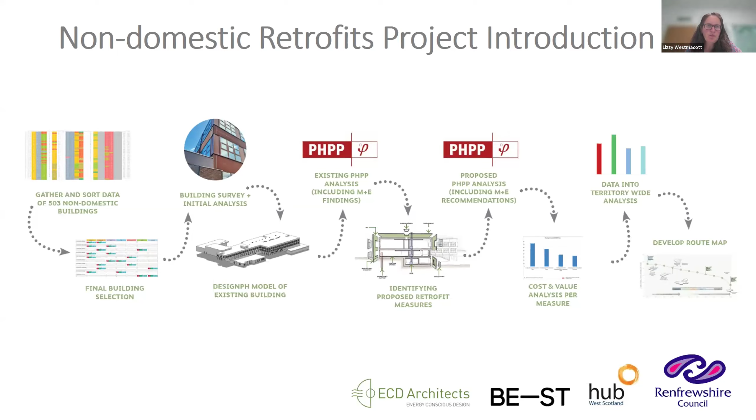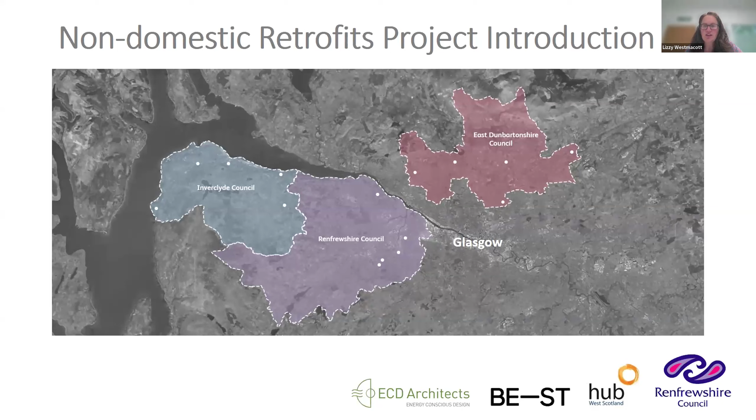I'm going to hand over to Neil now to talk a bit about why this is important to the councils.

Okay, thanks, Lizzy. So the Renfrewshire Council has 238 non-domestic buildings, but buildings isn't really our business. We provide key services to our communities. There's a local authority on the left there - that's what you'll find on page 1 of our website, and our buildings support that delivery of services. Obviously, we have operational and management responsibilities over them, but really, the vital thing for us, top priority, is continuously delivering those services. And any changes to that or disruption to it needs to be very carefully managed.

We do look to continuously improve what we can offer and remain adaptable to changes that come along, and that is a target that we are always working to. But this net zero challenge really is a step change that has been asked of our building stock. It's really unprecedented. I think we all are aware and signed up to and in full agreement with the political intent, the emergency in the climate. However, reality does bite when we go and look across our estate and see exactly how big the challenge is to upgrade or improve some of the buildings that we have.

And we really need to pivot, as the word I've used, to change our view of investment return, that the benefits we achieve aren't simply a financial return on investment. We have carbon as a currency now, and reducing our emissions and reducing the consumption of carbon is my top priority beneath delivery of services. And really changing our view of that and changing our view of how we make those investment decisions is going to be really important. Maintaining momentum is quite difficult because it's such a huge issue, a huge matter for us to deal with.

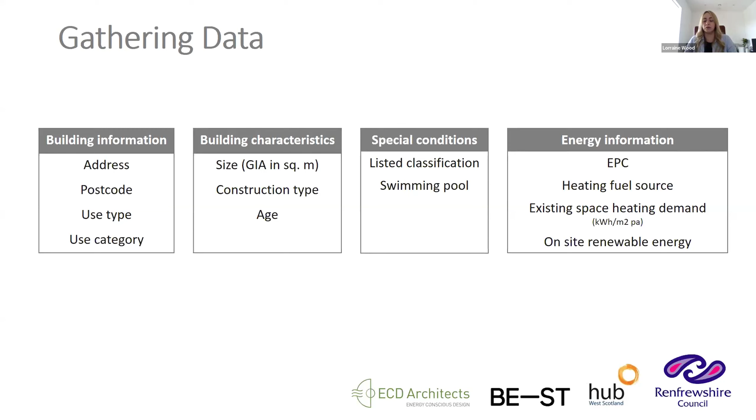We wanted to pull out any special conditions that would significantly impact a retrofit strategy, so things like if the building was listed or had a swimming pool, and then any general energy information such as the EPC rating, fuel type, space heating demand, and also whether or not there were any on-site renewables already.

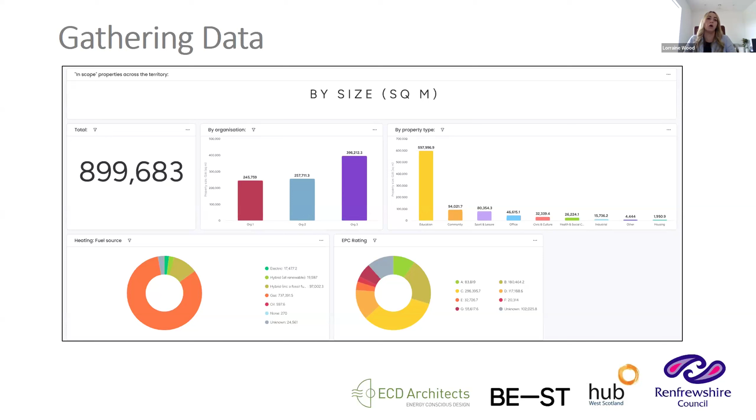Below this, the bottom left chart shows that the vast majority of the estate is fueled by gas for heating, and on the bottom right we have the breakdown of EPCs. That's just a quick snapshot of the type of data we could look at - we looked at it by size, by number of buildings, and all sorts of other things in between.

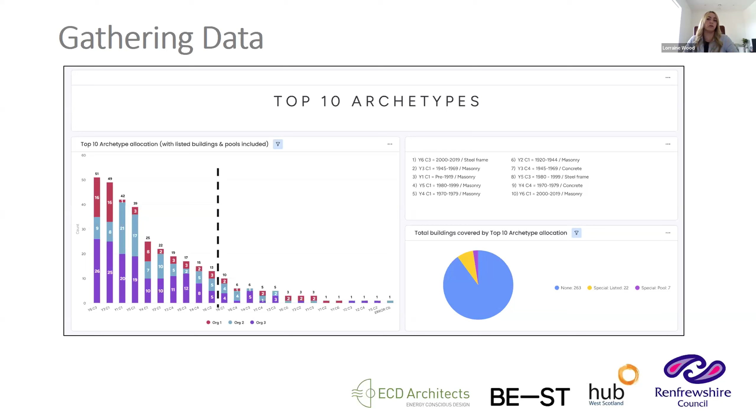The reason we wanted to assign archetypes was so we could understand what a general retrofit approach would look like when applied to groups of similar buildings. The idea was to complete detailed studies on 1 or 2 buildings from each of the 10 archetypes, pull out key data points like estimated retrofit cost or carbon reduction, and apply those baseline figures back into the database to understand the implications for the entire estate.

So that's kind of all from me at the moment. I've tried to summarise what was a fairly complicated process in a very short amount of time, but hopefully that gives you a flavour of the steps taken in relation to data and assigning archetypes. I'll now hand back to Lizzy, who will tell you more about the building studies.

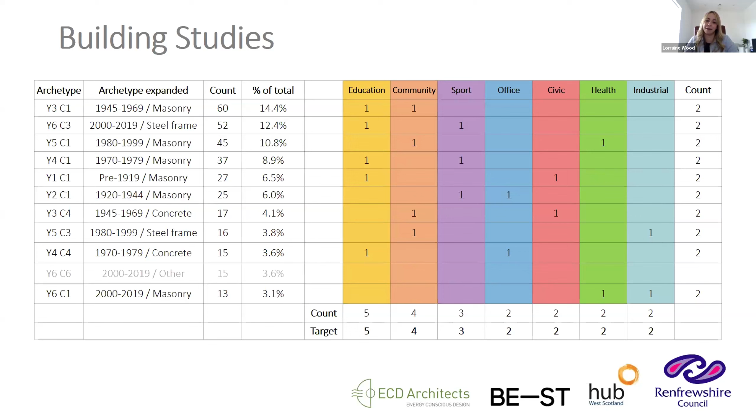So alongside that data gathering and sorting process, we were also working out with the councils how we were actually going to do these studies and what information we would be able to work out for each of the buildings we studied, so that we could extrapolate it across their wider estate.

That was really important - setting a target of how far we're going to go with these retrofits we're proposing. The councils each have set their own targets for when their whole building estate and all that they do will be net zero, and therefore when they'll need to decarbonise their buildings.

And that decarbonising means stopping burning gas, so getting rid of gas boilers. As Lorraine showed, the vast majority of these buildings are currently heated via gas boilers. But if we just take out the boilers and run the buildings on electricity, even using that electricity to power a heat pump, that will typically still put the energy bills up because electricity is that much more expensive than gas.

So for each building, there wasn't a specific target in terms of kilowatt hours or carbon. The target was finding a sweet spot where we do enough fabric retrofit to reduce the total energy use so that when we swap the boiler out for a heat pump, the energy bills won't go up.

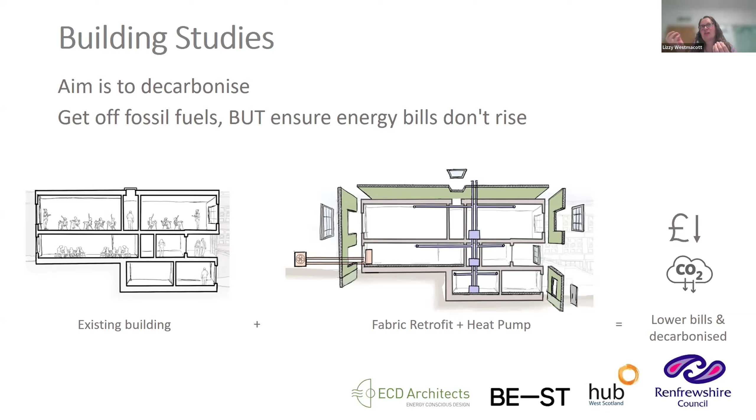So you start with your existing building on the left, you add on this fabric retrofit, you add on the heat pump, and consequently, your bills go down at least slightly, but crucially, the carbon emissions go down.

So back to the buildings that we chose, and we picked these buildings, and then we spent a lovely few weeks, or a few days of a few weeks, visiting these various buildings. So we've got a town hall in Milngavie, we've got various schools around the place. We've got a community centre right on the coast at Wemyss Bay.

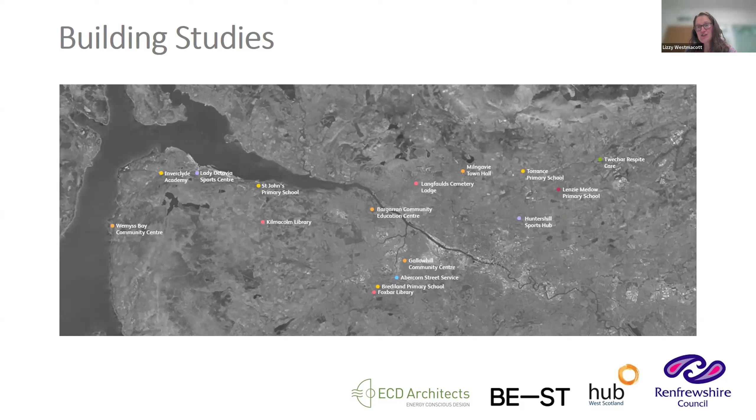We also hung around buildings with clipboards and measured things, tried to find out what was behind the render. Sometimes the buildings made that very easy because the render had all fallen off. Other times it was a bit more guesstimation going on and trying to find bits of the buildings where we could work out what the construction was.

And while we were in each building, we also made sure that we spoke to some of the building users and those who ran the buildings day to day. So that was both to find out about the issues that they already have. Is it drafty? Is there a leak somewhere? Have you got a mold issue? Does the boiler break down all the time? Some of those things the councils already knew, but sometimes, speaking to people on the ground can highlight certain things. But we also needed to understand how often the various areas of the buildings are used.

So here we've got a plan of a library and community centre, and the different areas are marked up in different colours. And then we've got a schedule that went along with that, showing how much of the time each of those areas is actually in use. Some of the buildings we use really consistently. So schools generally at the kind of full capacity during the school time, but obviously in the summer, they're not much used. Some of the buildings are used far less frequently.

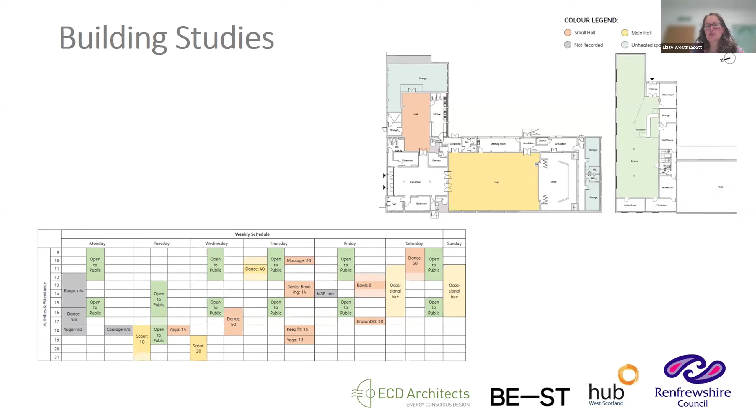So this affects not just how much energy the buildings are going to use in their existing condition, because they might not be heated all the time, for example, but also how we might go about retrofitting them, because disruption is going to matter a lot more to some building uses than others.

And for each building that we went to, as I say, we tried to understand how the building was put together, and we produced a sort of sketch section to at least part of the building, demonstrating our understanding of the current building construction. And then once we proposed our retrofit measures, we applied those onto our sketch section to give each council an idea for each of their archetypes, the sorts of measures that we would be proposing.

And we also went through and kind of highlighted where the risk areas might be in terms of retrofit. So where we need to be sure that we were really understanding any thermal bridge risk or any water ingress risk or whatever. So that gave them a bit more than just the data. They also had something that informed the specification that we were giving for each archetype.

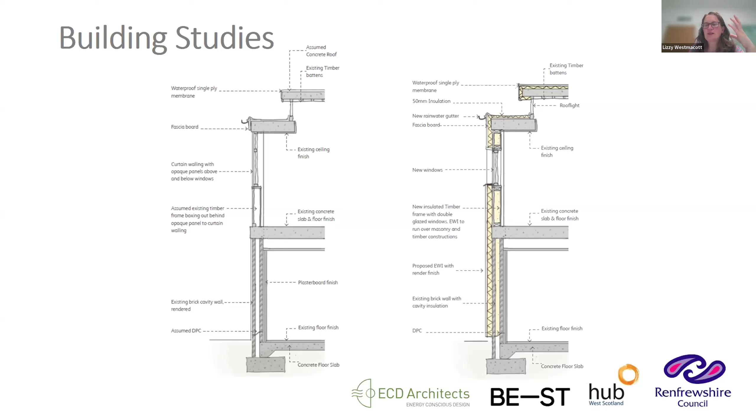Using our passive house planning package model, this is an example of the output we got for the heat demand of each building.

On the left here we've got the heat demand of an existing building, and on the left-hand graph we've got all the heat losses from that building. We're losing a lot of heat through the roof, quite a lot through the walls, and so on.

Then here we've got the heat gains in that building. We've got some solar gain, so sun comes in through the windows and heats the building up a bit, and a little bit of internal heat gain because people are doing stuff in the building. All the rest of the losses need to be made up for by actually putting heat into the building, using the boiler.

After the retrofit, we've reduced our heat losses quite a lot. We've insulated the roof, so we've reduced the heat losses through the roof, and we've insulated the walls, so we've reduced the heat losses there. We've still got some solar gains and internal heat gains, but because our losses are so much lower, we need far less heat to keep the building at a consistent temperature. We've managed to reduce that heat demand by 156 kilowatt hours per metre squared per year.

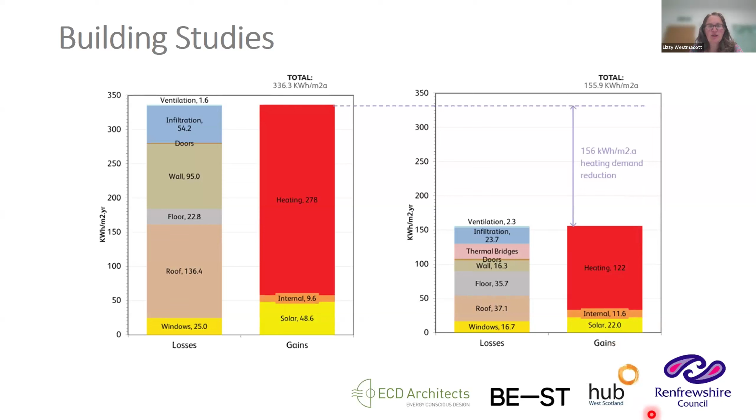That reduction in heat demand itself lowers carbon emissions, but it also means that when we put the heat pump into the building rather than the boiler, the heat demand will be low enough that the heat pump can work efficiently, and it will also cost less to run than it's costing to run the boiler at the moment. As I said earlier, that target's really critical for the councils.

Another graph, I'm afraid. On the left here we've got the energy bills of one of the buildings at each proposed retrofit step, and on the right we've got the carbon emissions for the same steps.

This is our current energy bill, around £36,000. If we just insulated the roof, those bills would drop to around £27,000. If instead we just insulated the walls, so external wall insulation and cavity wall insulation, our bills would drop a bit, but not by quite as much, down to £31,000. And so on and so forth.

If we put in just a heat pump and took out the gas boiler, our bills would shoot up to £52,000. So it was really important we didn't do this - this is why we're doing all of these fabric retrofit steps as well. They'll make the buildings more comfortable and probably more durable, but also we need the bills not to go up when we put the heat pump in, because that's not affordable for the councils.

Adding PVs also reduces the bills. If we put all these measures together - fabric retrofit, heat pump, and photovoltaic panels - we can see that we're actually managing to bring the energy bills down.

If we look at the same thing but in terms of carbon, we've got our existing carbon emissions, 63,000 kilograms of carbon emitted a year by this building. Trying out each different step of the retrofit, you can see the impact on carbon emissions.

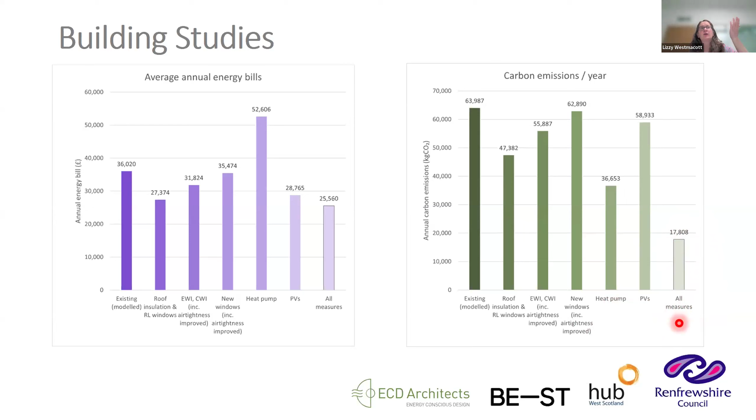So then for each building, we got useful things like the cost of doing these retrofit works and the total carbon savings of these retrofit works. But we also calculated what those were on a per metre squared basis.

Because it's all very interesting knowing how much it'll cost to retrofit this particular building, but what we were really interested in for the big picture, for this big data picture extrapolation across the estate, was those per metre squared figures, because that's the information we want to apply to other instances of similar buildings of the same archetype.

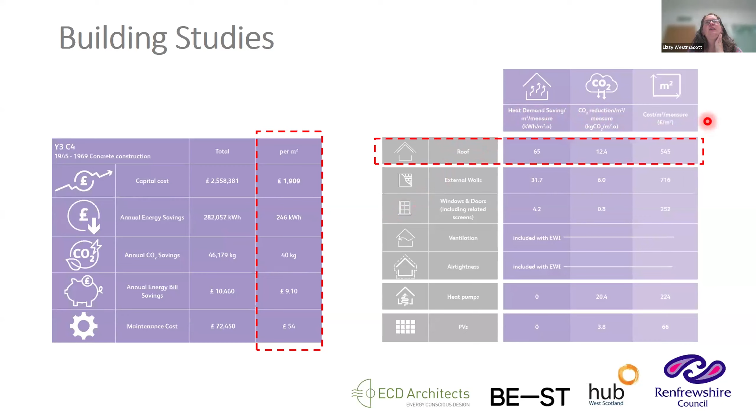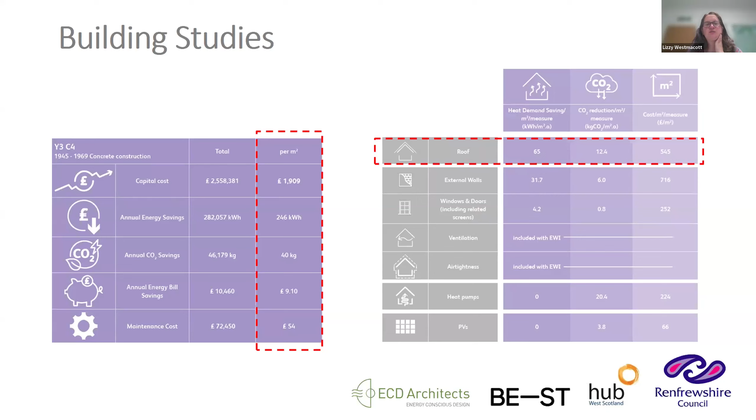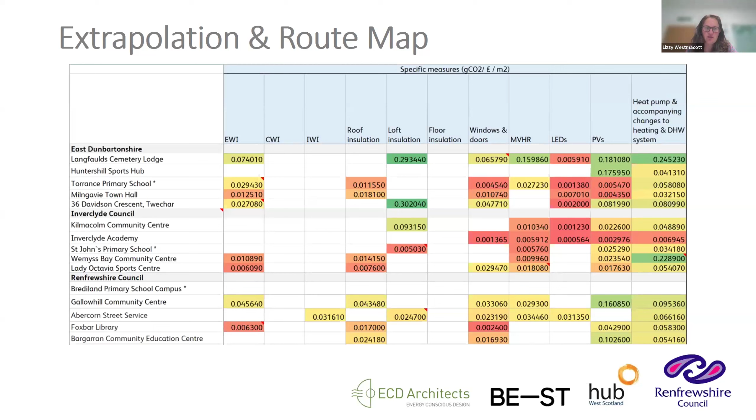That's a very specific breakdown, but it's the kind of data we were able to apply to all the other buildings. That meant that for every building across the council's estate, we had an approximate cost of doing retrofit work, amount of carbon saved, and so on, so each council could see how much carbon they could save, how much it might cost, and think about the impact of individual measures within the bigger picture. This is still a work in progress, but we've had detailed discussions with one council to create their own specific roadmap.

In their case, they started off with 93 buildings, and they're already planning to dispose of some of those for various reasons, some of which they'll actually be rebuilding. It made clear to everyone how imperative it is that any new buildings be net zero, because we can't create more problems for ourselves when we've already got so many buildings to decarbonise.

There are a few buildings in their estate with no heating, like sports pavilions, and a few already on electric or fully renewable technology, so they don't need decarbonising. But we've got 54 buildings left needing some sort of phased decarbonisation. For this council, East Dunbartonshire, their net zero target is 2036, so 11 years from now we've got to get 54 buildings decarbonised. It's a big ask, but not as big as Neil's got to face up to.

If we get those buildings off gas and running entirely on electricity, that's great, but there are clearly still some remaining emissions from that electricity. As promised, the electricity grid is going to decarbonise over time, so those emissions will reduce and tail off.

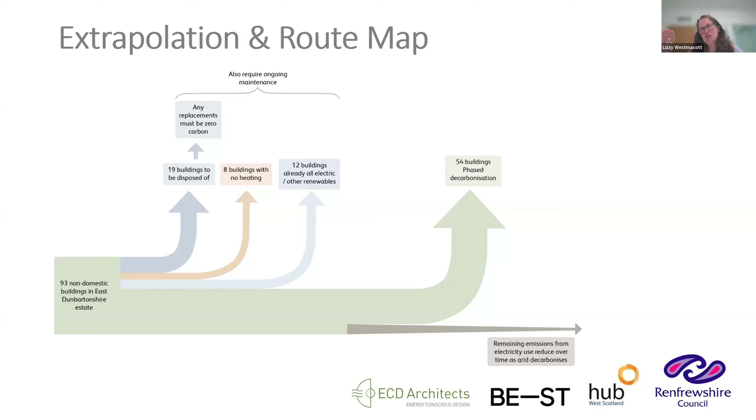So how do we go about thinking about this route map? Even though we've only got one council's buildings, we've still got a big long list of buildings here, longer than what you can see on the page. We got from the council when they thought each of those buildings would need their boilers replaced, and those are shown in this column.

Those highlighted in red won't actually need their boilers replaced until after the council's net zero target date of 2036. But if the council is going to be net zero by 2036, they'll need to replace the boilers with heat pumps or something similar earlier. So first we imagined carrying out the full retrofit of each building in the year its boiler needed replacing - if the boiler needs replacing in 2029, we put the entire cost of retrofitting that building in 2029. Those whose boilers didn't need replacing until after 2036, say 2043, would still get their boiler replaced and all their retrofit carried out by 2036.

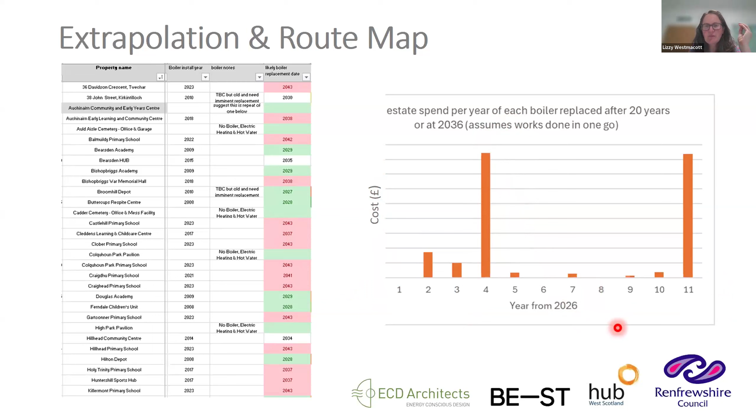On the right here is the 11 years from now to 2036, and the cost on the left. As you can see, that's not a very happy spend profile for a council, because they don't want to be investing 50 times as much money in one year as in some other years. So we needed to look at that in more detail.

We started looking at spreading the works out over time, so most buildings' retrofits got phased over time. A few might be done as a one-hit thing if they're in particularly bad condition at the moment, or the way the building's used means that's the best approach. So we phased these buildings, making sure the finish date of the retrofit was in time for that boiler to be replaced with a heat pump.

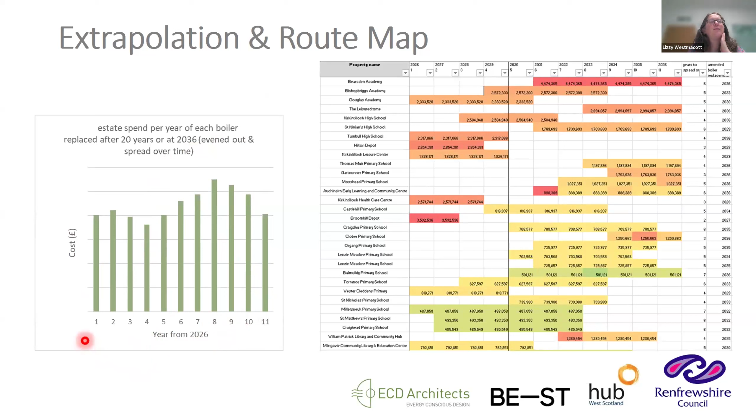So flip this around, on the left here is the spend profile. The cost in each year is much lower than the highest cost we had previously, but the cost each year is quite even, so it's a much more acceptable spread of the spend. It's still quite expensive, but it also acknowledges that retrofits are likely to happen over time.

The council's unlikely to have the money to do all the retrofit of one building all at once. If we can integrate retrofit measures with maintenance that's happening anyway, when windows need replacing they get upgraded, when the roof needs redoing we get more insulation, but also prepare it for PVs to be added later. Make sure the roof overhangs a bit so we can bring external wall insulation up underneath in the future. This phased approach acknowledges that's a more realistic way for this retrofit to take place.

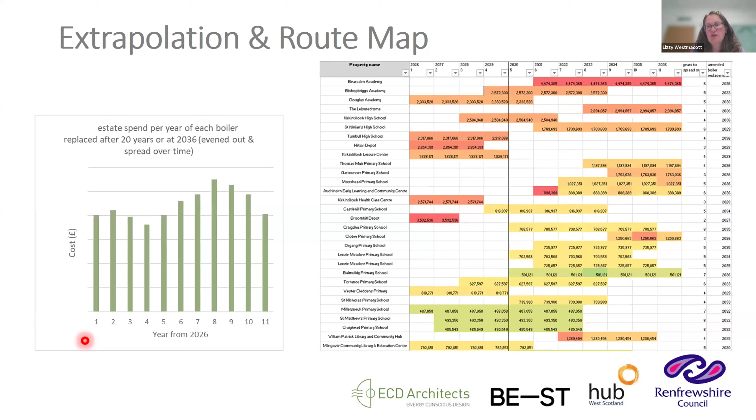And then we used Power BI to create a nice dashboard for the council. This is going into the council's carbon action plan, which they need to prepare and share with the council and people in the local area, so it was important that it looked good and was graphically something people could understand.

This is a slightly redacted version, and it's actually interactive in the dashboard, but we've just got a few images of it here.

We've set out things like the fact that at the beginning we've got to focus on buildings that need fairly urgent boiler replacement. After that, we're able to integrate maintenance and retrofit more over the rest of the period until 2036, with key milestones where we get our first building decarbonised.

We're sharing an example of this primary school getting decarbonised over several years between 2029 and 2035. First we insulate the roof better, add some PVs on top, sort out ventilation with mechanical ventilation with heat recovery, before making the building more airtight by replacing windows with good installation, and bring in external wall insulation. Finally, once we've done the fabric and services work, heat demands reduce significantly, so we can put in the heat pump and energy bills will still be lower.

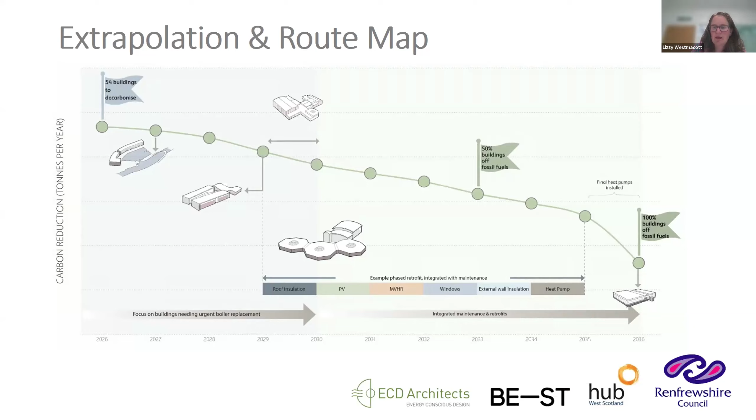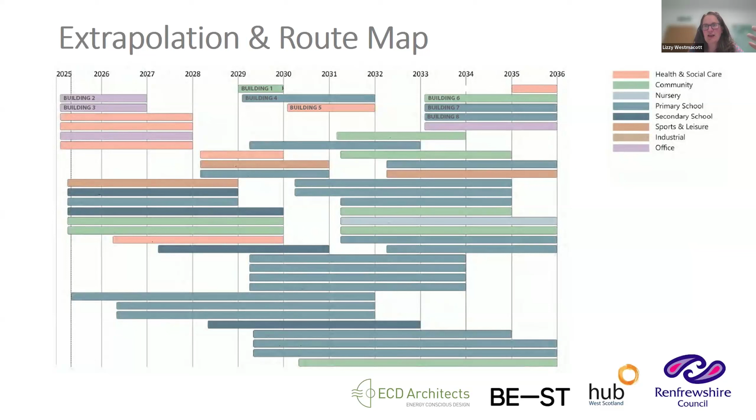We also set out for the council, again with some information redacted, which buildings might be retrofitted when. As soon as we put this on a timeline and put it under their noses, they were like, oh, I wouldn't do that, I'd move that forward and put that later. There's nothing like having it written down to bring out people's criticism, but that's really important - if we don't get people talking about it, it's definitely not going to happen. Just having it drawn and put under people's noses was a really critical way to get the conversation going and mean that something's happening.

Another thing we learned from this was to demonstrate that we've got a pipeline of various retrofit works happening over the next 11 years, and that the council can buy bigger packages of work to make it more cost effective. For example, in grey here is all the heat pumps being replaced - if they can partner with a heat pump manufacturer, they can make that more cost effective. Similarly, the white blobs here are external wall insulation being added, so there's a real pipeline of work there.

The other thing that Hub West are trying to get us all talking about is the possibility of councils working together to procure this and have an even bigger and clearer pipeline of work. So there's definitely exciting next steps to follow.

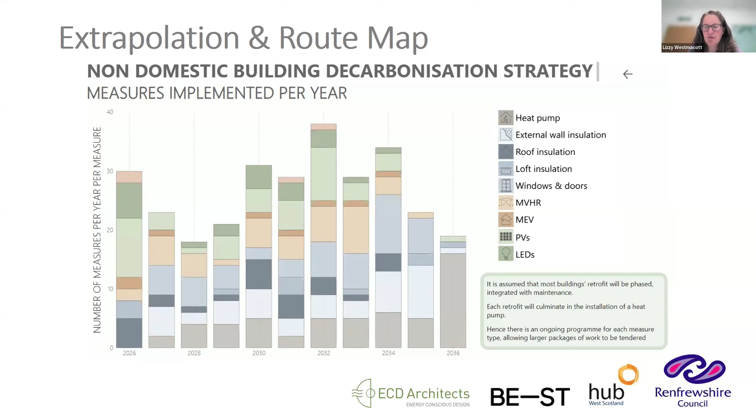Like a big red light's going to go off and say, no, you can't do it. You really need to think more carefully, go back to the outline specification we've prepared, and make sure that rather than just doing that little maintenance job, we're actually looking at the bigger picture, looking more strategically, and adding in appropriate retrofit work to that piece of work.

And very gratifyingly, one of the councils has already got in touch saying, actually, we need to re-waterproof a couple of our school roofs. It'd be great if you could give us a specification to do that in the right way, rather than the quick way.

So that's exciting. And I will just hand over to Neil to kind of wrap up and talk about where this leaves the councils.

Yeah, that last slide of Lizzy's just reminds me of sitting exactly like that and being handed a project to re-roof and re-window schools three years ago, and the red light was in my head. But nonetheless, it's kind of where we came in on this journey, because we are aware that we're going to have to do things differently. We simply can't proceed the way we have been in the past.

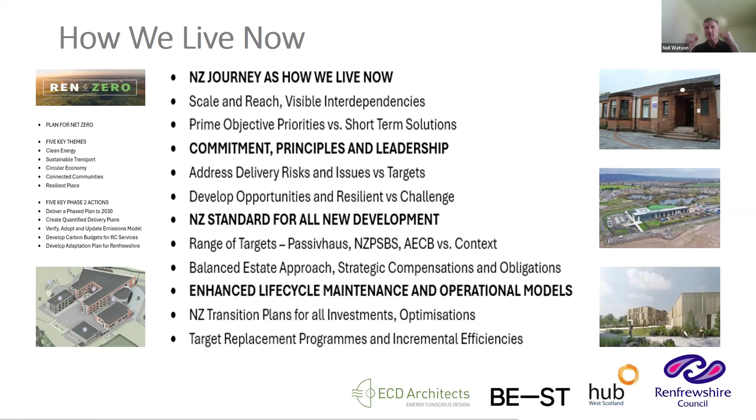And those replacement programs that are currently funded may need to be expanded, and someone else will find me the money, and I'm happy to make the case for it. But every incremental efficiency is going to get us towards that carbon target, and I'll remain positive about it.